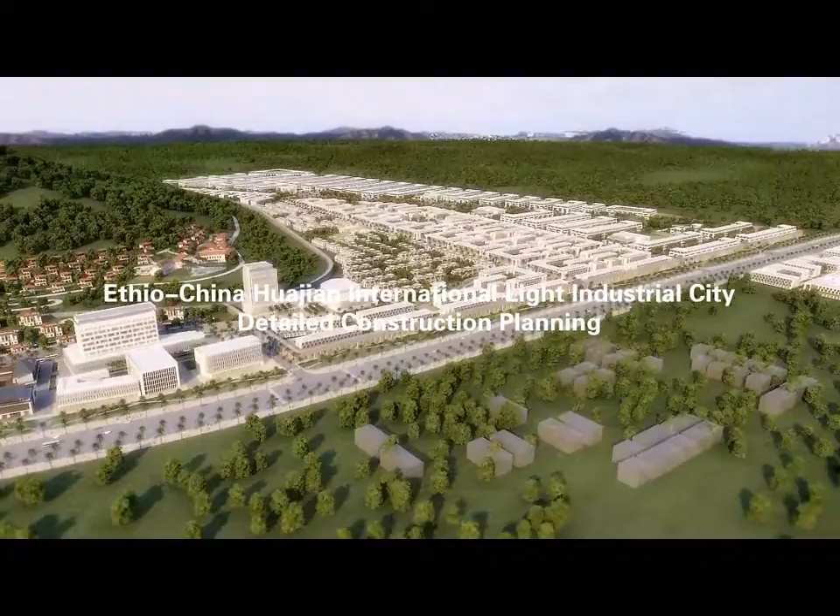An efficient, industrial new town with sustainable urbanism at its core. An economic stimulus for a rapidly developing Ethiopia. An industrial beacon of light and a viable model for others to follow. This is the vision of the Ethio-China Huajian International Light Industrial City.

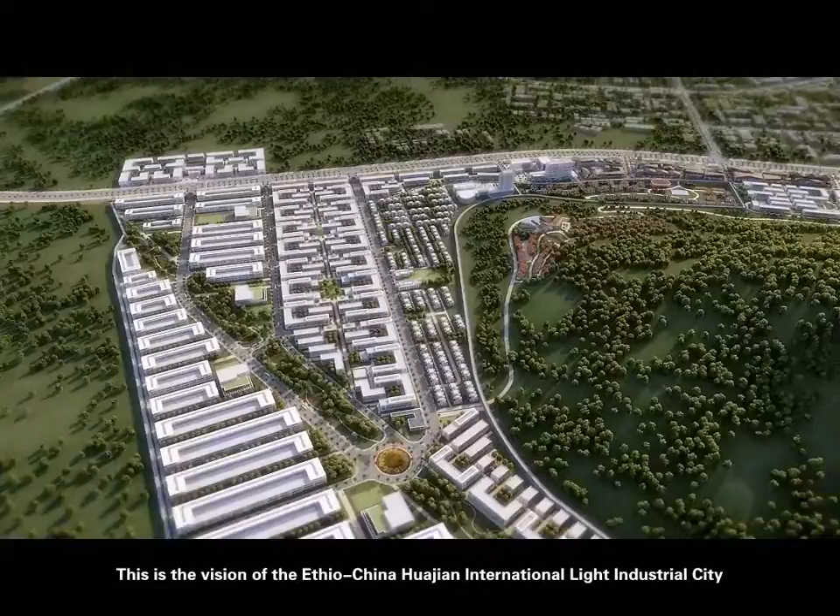The Light Industrial City is located in the south of the bustling Ethiopian capital of Addis Ababa, bounding the Inter-African Highway which connects Addis Ababa to the number 4 and number 7 national highways. The site contains distinctive geological and situational characteristics.

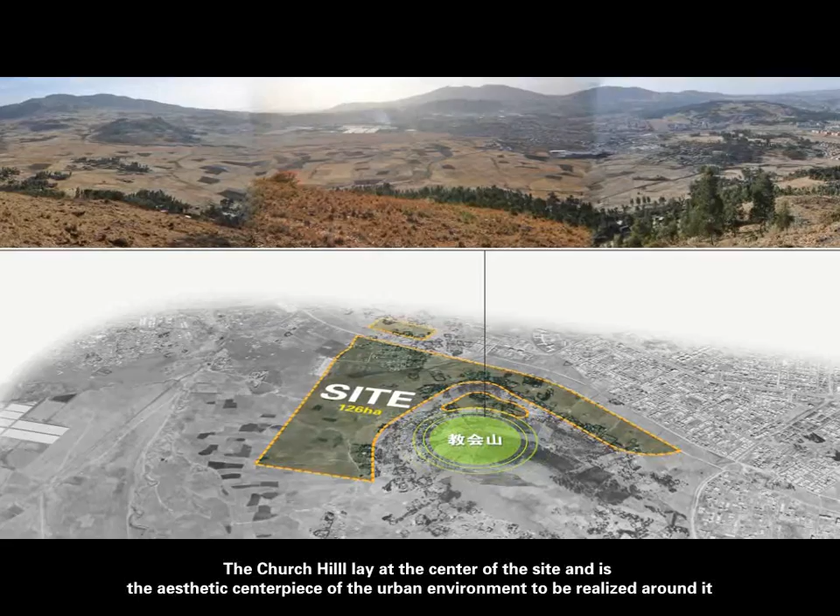The Church Hill lay at the center of the site and is the aesthetic centerpiece of the urban environment to be realized around it. Standing at the top of the hill provides a panoramic view of the modern light industrial city.

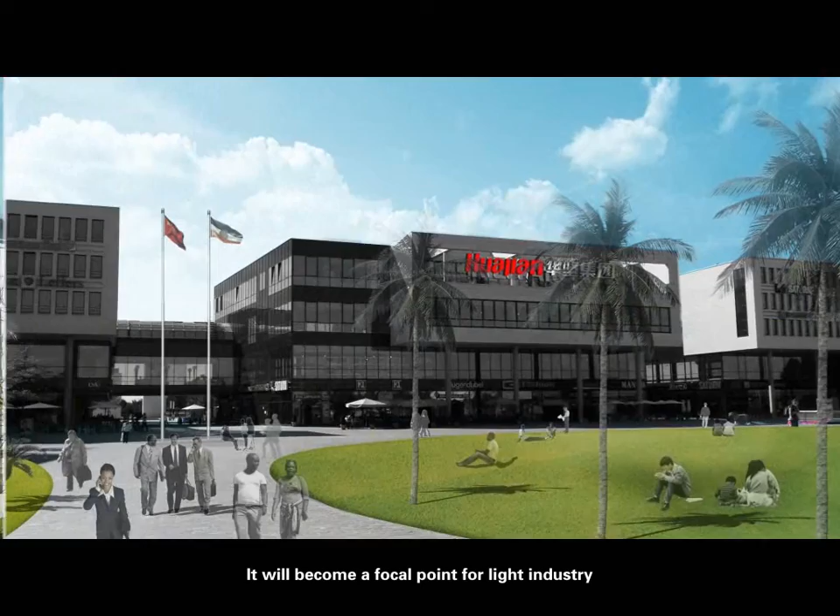The light industrial city will become a light manufacturing hub, producing footwear and apparel in large volumes. It will become a focal point for light industry, ushering Addis Ababa and Ethiopia into a new era of productivity and stimulating economic development on a large scale.

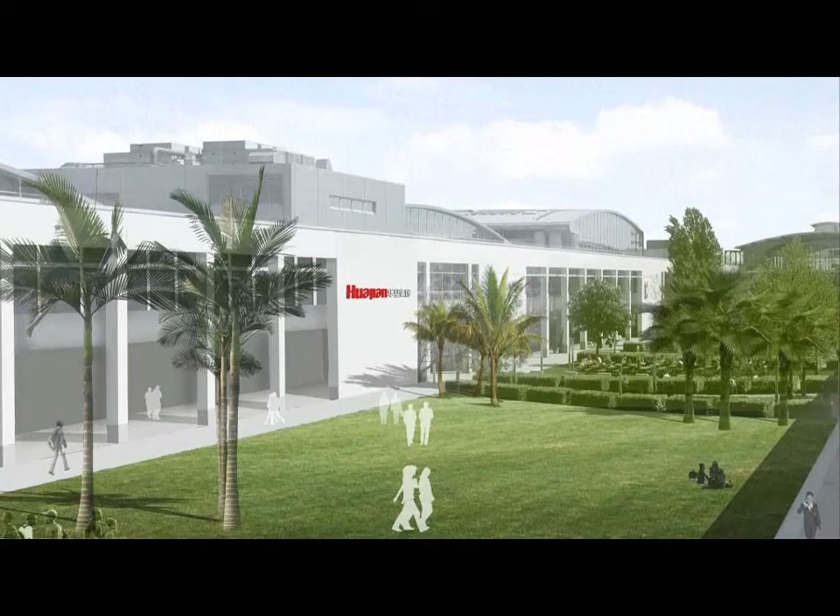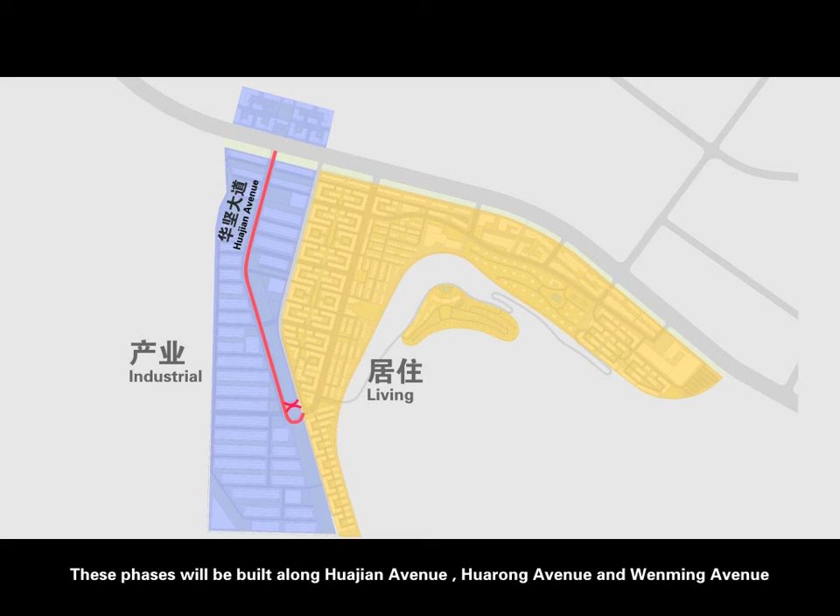This vision is to be realized step by step through an ambitious plan to develop a new town over the next several years. These phases will be built along Huajian Avenue, Huarong Avenue, and Wenming Avenue, each maintaining a balance between work and living.

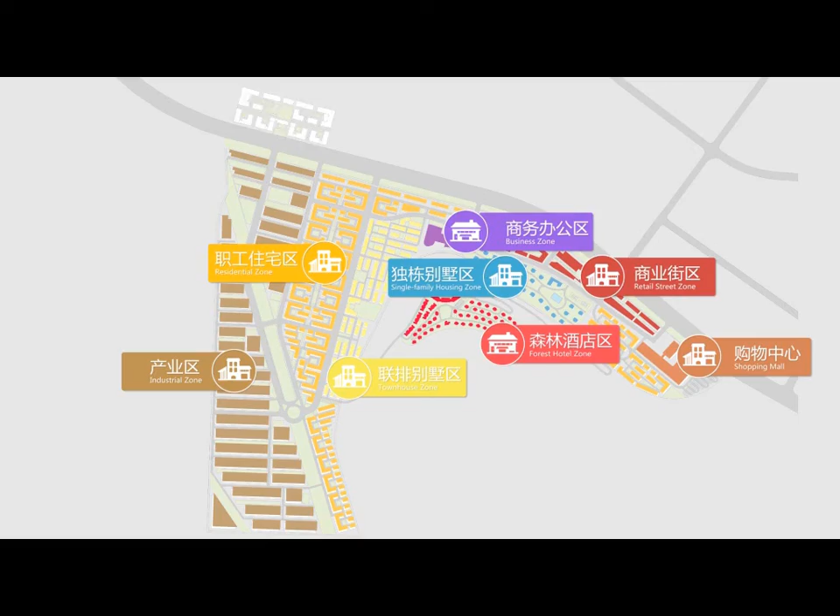Different districts of the industrial zone are connected by Huajian Avenue, and each district will include soccer fields and comprehensive employee food and leisure centers.

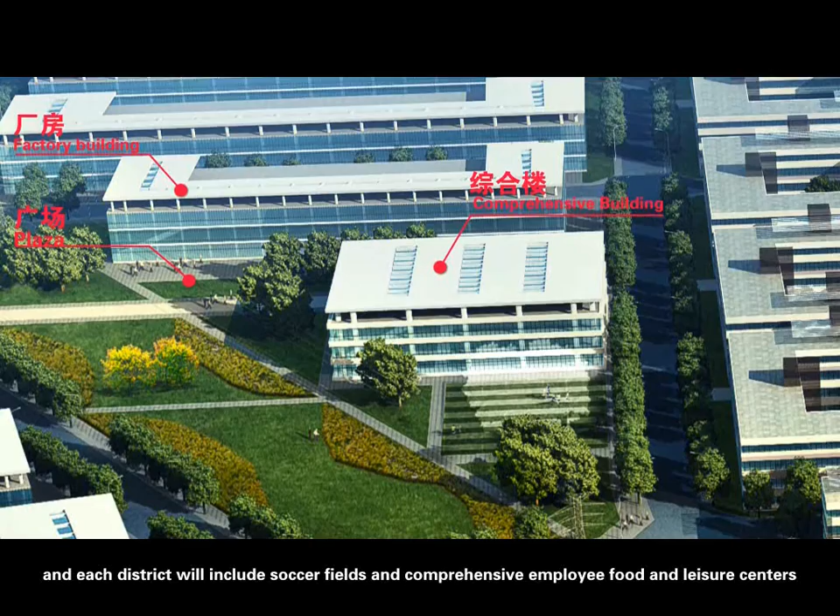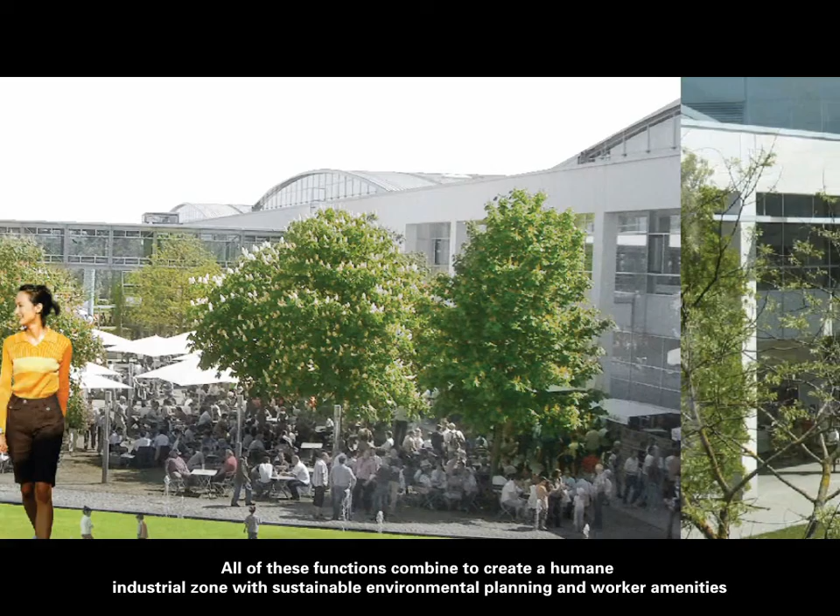The multifunctional central buildings will cater to the daily needs of employees. The soccer fields will provide space for rest and recreation. All of these functions combine to create a humane industrial zone with sustainable environmental planning and worker amenities.

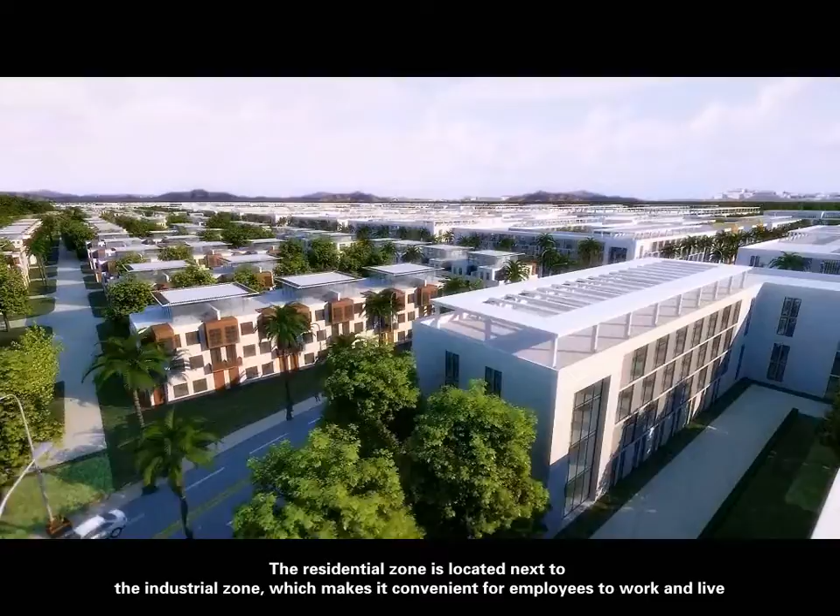The residential zone is located next to the industrial zone, which makes it convenient for employees to work and live. The spatial organization of courtyard buildings creates a diverse set of community open spaces.

The villa zone, which borders the hill, supports a peaceful environment and provides private living spaces for middle management and senior executives. The comprehensive commercial zone connects linear commercial spaces by an internal retail street. The interspersion of architectural layouts and courtyard buildings creates bustling leisure spaces.

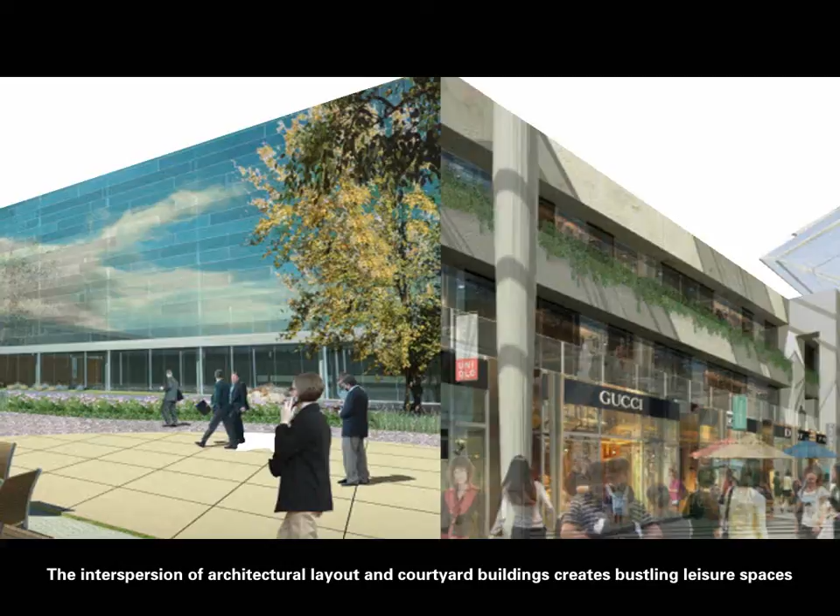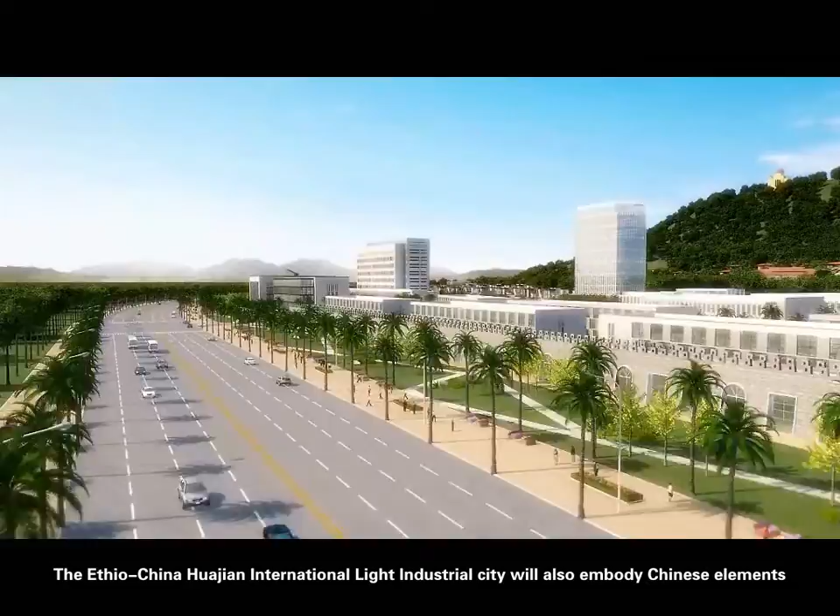The Ethio-China Huajian International Light Industrial City will also embody Chinese elements. Traditional Chinese wall designs will be embedded in the overall design of space.

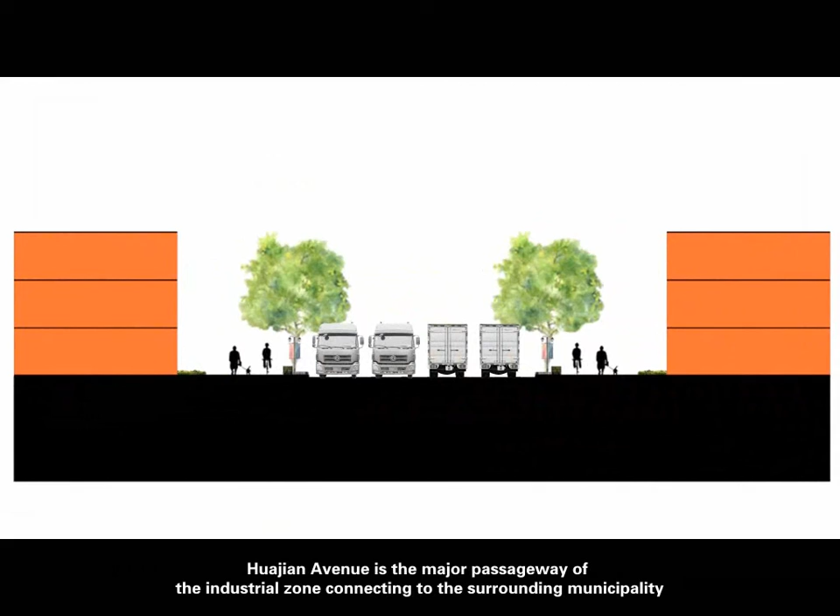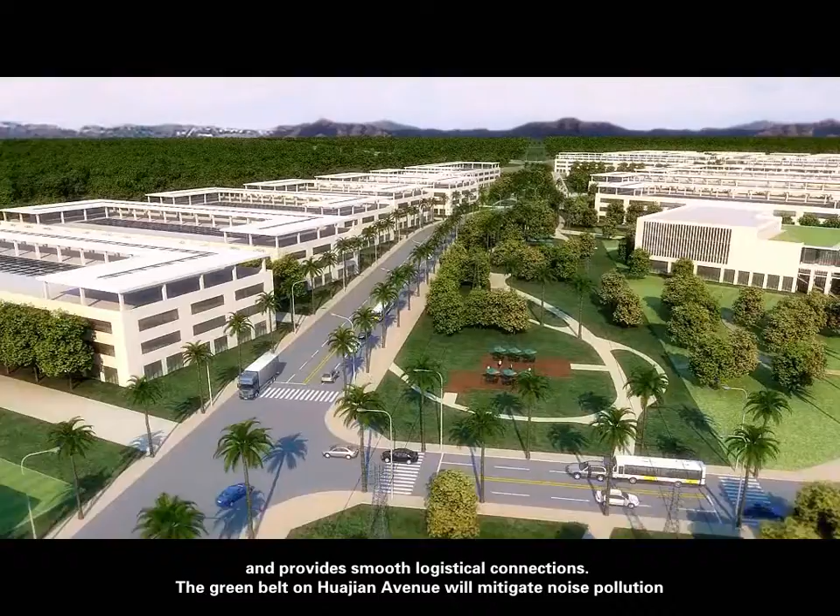The transportation network is designed around hierarchical layering principles. Huajian Avenue is the major passageway of the industrial zone, connecting to the surrounding municipality and provides smooth logistical connections. The green belt on Huajian Avenue will mitigate noise pollution.

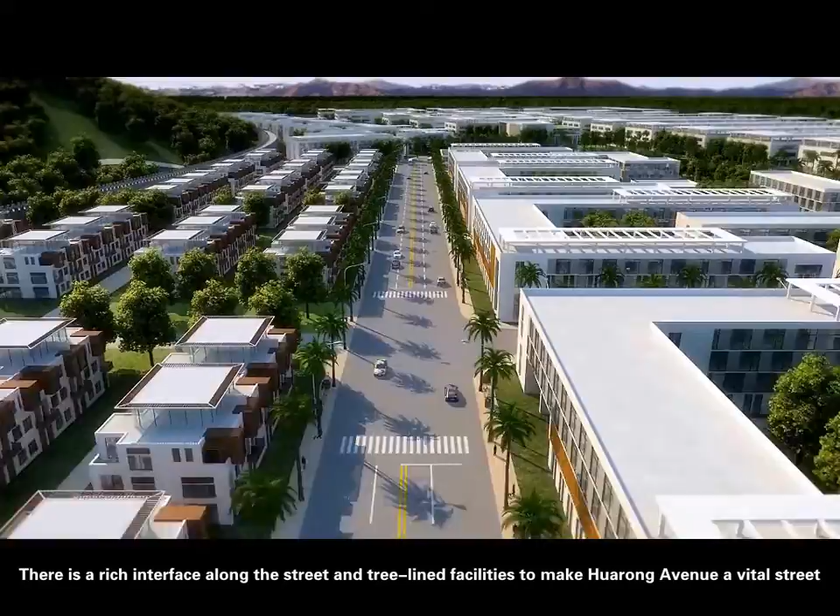Huarong Avenue is the major passageway of the residential zone, connecting to the rest of the city. There is a rich interface along the street and tree-lined facilities to make Huarong Avenue a vital street.

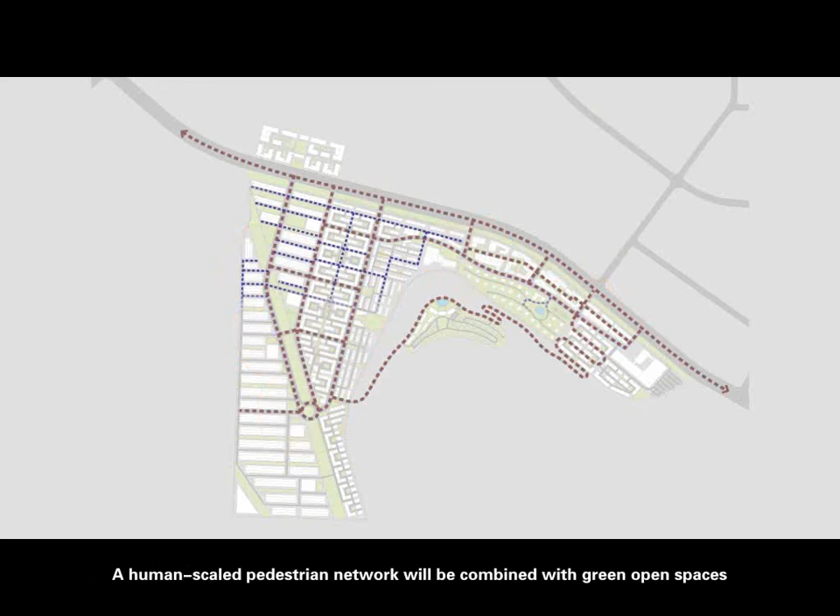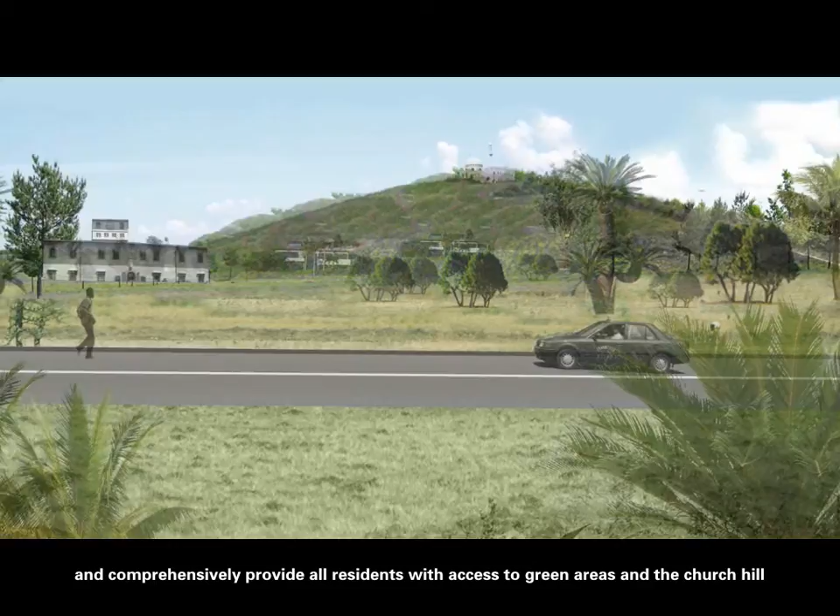A comprehensive transportation network is also built into the industrial city. A human-scaled pedestrian network will be combined with green open spaces. The open space network and spaces for public activities link together all areas of the zone and comprehensively provide all residents with access to green areas and the Church Hill.

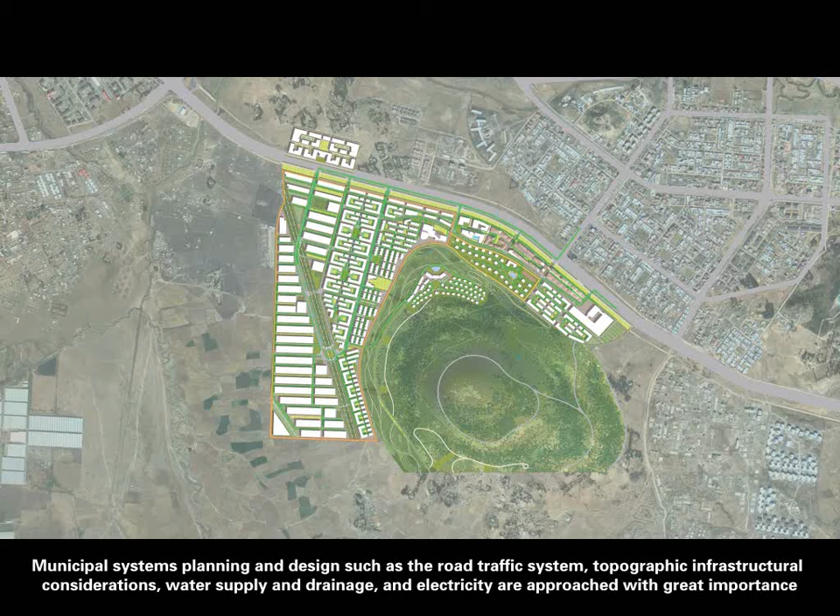Municipal systems planning and design, such as the road traffic system, topographic infrastructural considerations, water supply and drainage, and electricity are approached with great importance. A reasonable functional layout, open space network, road connection and municipal system support the healthy, sustainable development of the Ethio-China Huajian International Light Industrial City.

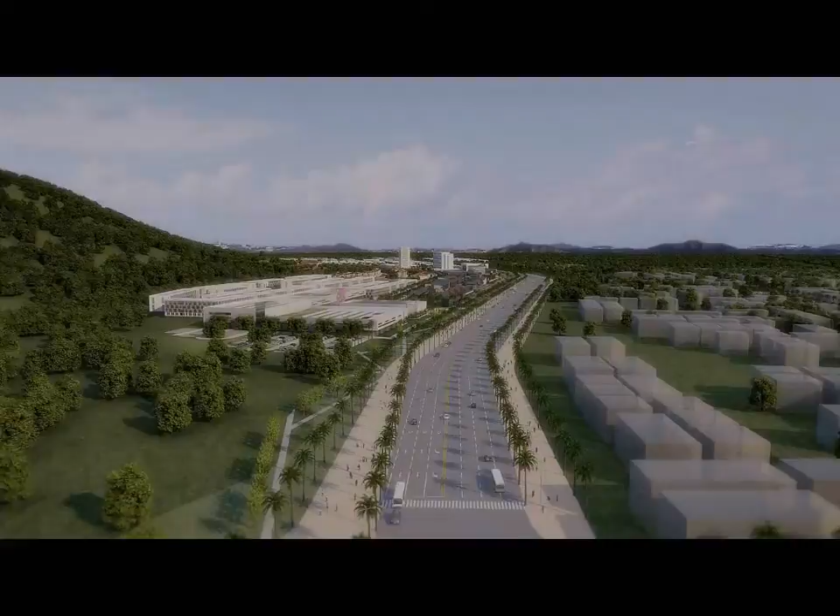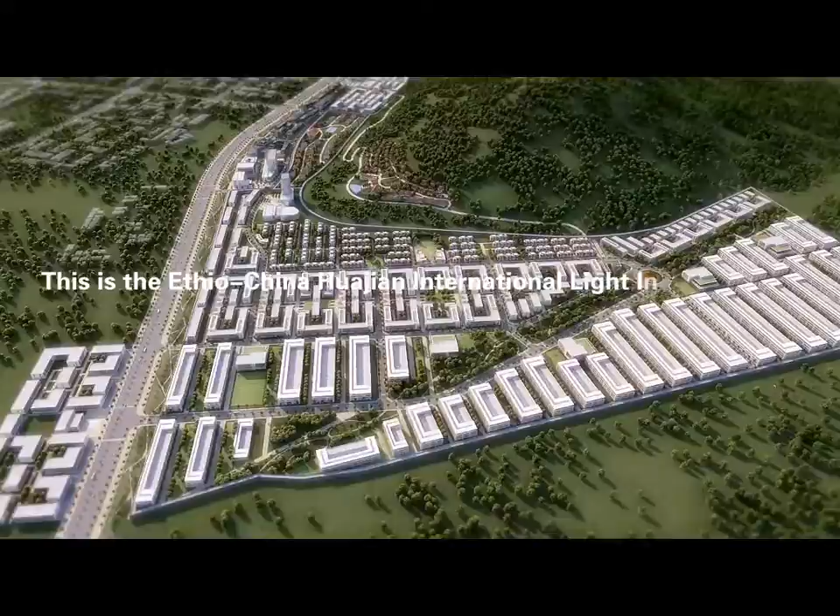An industrial town which is more than just an industrial town. A human-scaled community where a rich and full urban life can be realized. A commercial and industrial center which will develop into a world-renowned industrial hub. This is the Ethio-China Huajian International Light Industrial City, Ethiopia's doorway to the future.